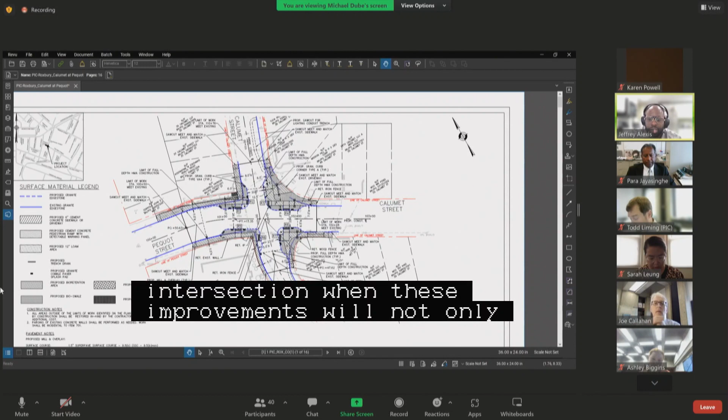With these improvements, we will not only improve accessibility and pedestrian safety at this intersection, but we hope to implement additional design elements like new lighting to improve visibility and green infrastructure to address potential heat island issues we tend to see in intersections like this one.

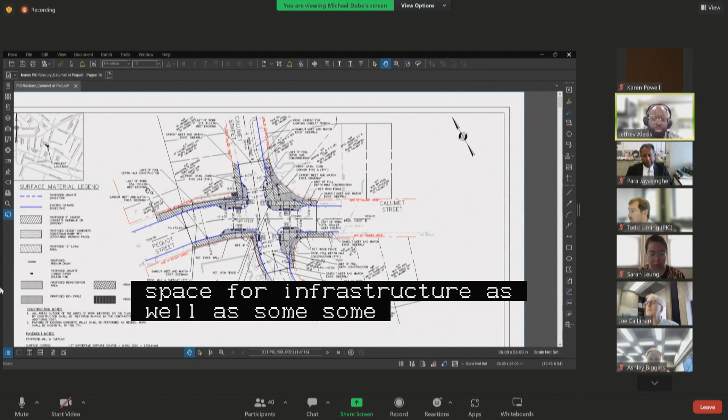As this is a continuation, we have been working with some of the residents in this neighborhood regarding concerns they had about the proposed improvements. We have looked at opportunities to make changes to the design, including reintroducing a parking spot that we had removed in order to provide more space for green infrastructure, as well as some elements we are including for one of the property owners at this intersection in regards to their driveway.

There are concerns about some of the snow removal, but we have been working with them, and we're hoping that the safety benefits we're proposing as part of this project outweigh some of the negative aspects, which is the additional sidewalk space that may need to be plowed.

With that, I'll turn it over to Mike to get into more of the details. Thanks, Jeff. Good morning, commissioners. My name is Mike Dube with GPI. As Jeff mentioned, this is a project at Pequot Street, Calumet Street, Darling Street, in Roxbury. This project proposes to improve pedestrian safety overall at this intersection by minimizing the sea of pavement, providing curb bump-outs that shorten pedestrian crossing distances, providing new cement concrete pedestrian ramps, sidewalks, green infrastructure with plantings and low ground cover, and new underground lighting infrastructure.

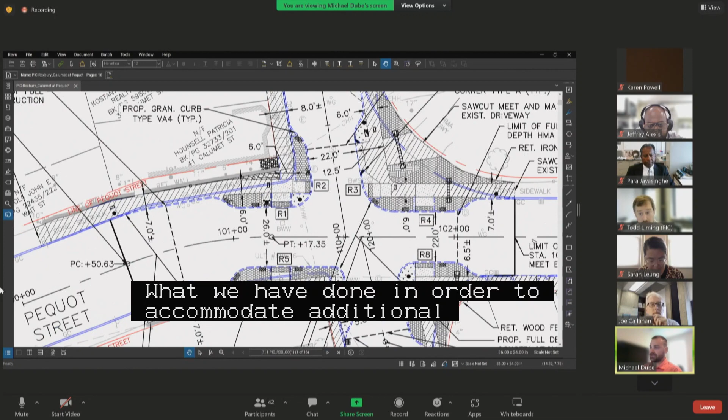As Jeff mentioned, we've coordinated with the public recently after the last public hearing to introduce a couple of minor changes to address some of their concerns. One concern was the limitation or removal of parking spaces. So to accommodate an additional parking space, we've reduced this curb bump-out on the north side of Pequot Street, shortening it up towards the intersection, providing an additional space here, giving back one more parking space at the intersection.

Another concern was related to the driveway at 49 Calumet Street in this corner. We were previously just constructing up to the driveway, but through coordination with the property owner and future development proposed there, we've extended the sidewalk reconstruction. We proposed a new driveway curb cut so the future development can be installed with our proposed bump-outs and intersection geometry. So those were the two changes made in coordination with the public since the previous public hearing, and these are the plans we're proposing to move forward with. I'll open it up to any questions.

Commissioners, any questions? And I will just say, if there are members of the public who are interested in testifying on this, please use the raise hand function on Zoom, which you can find under reactions. You should be able to find the button to raise your hand, and we'll call on you once commissioners have had a chance to speak.

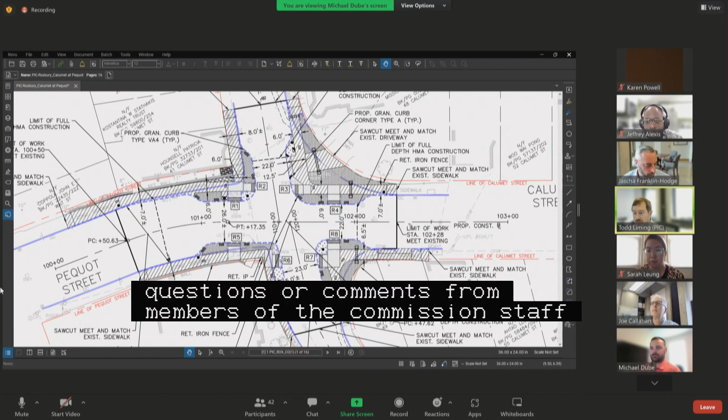Commissioners? All right, seeing no questions or comments from members of the commission, PIC staff, or members of the public. I'll mention that we had a few pieces of written testimony come in over the past few weeks, but those have been passed on to the commission for consideration. I'll give the public another 15 seconds or so to try to find the raise hand function if they want. PIC staff doesn't have any comments other than that I understand the latest plans have been updated, and we'll need a copy of those from the project team as soon as they're available. I see no raised hands.

I think we're all set. All right, do I hear a motion to approve? I make a motion to approve a petition by the City of Boston Public Works Department for the making of specific repairs in Calumet Street, Pequot Street, and Darling Street as read into the record by the chair. Second. All in favor? Aye. Aye. Aye. Any opposed or abstain? So moved. Thank you very much.

All right, we are going to jump back in our agenda to utility pole hearing number 1, which I will reread: a petition by Eversource Energy for a utility pole installation within Soldiers Field Place, Public Way, Brighton, to install 1 new private utility pole to be located on its southerly side, generally across from address number 44, southeast of Soldiers Field Road.

Would the proponents please introduce themselves, their affiliations, and walk us through what you're proposing to do? Hi, good morning, my name is Katie Flaherty, and I'm going to share the screen to show you the plan. You should be able to share. Bear with me. I have to share—oh, I don't know which one is. Sorry, we're having trouble here. I'm trying to share a screen with the plan on it, and I'm not able to.

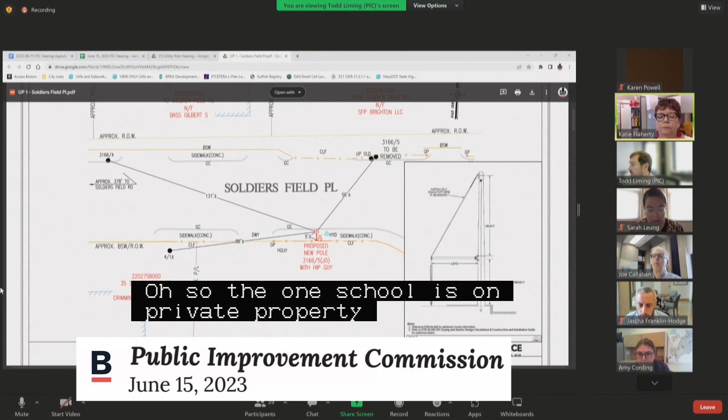Is the guy pole existing? It is not, and that's on private property? It's not on private property. Oh, so the existing pole is on private property. But we are gonna, that guy wire on there won't go. We'll put a hip guy on the proposed pole. So everything's shown in red right there.

The pole will go in the sidewalk, and then there'll be a sidewalk anchor. The guy wire will be overhead and then come straight down, as opposed to at an angle on that pole.

But you're installing a guy pole on private property? No, we're installing that proposed pole on the public way, on the sidewalk, I'm sorry. So pole 5, currently on the north side of the street, we're gonna move it to the southerly side, and then that pole 5 will have a guy wire on it. The original pole 5 will come out once everything's moved.

And I guess the question is, where does the guy wire go? The anchor will go as close to the fence as possible, but it'll still be within the public way, at the back of the sidewalk.

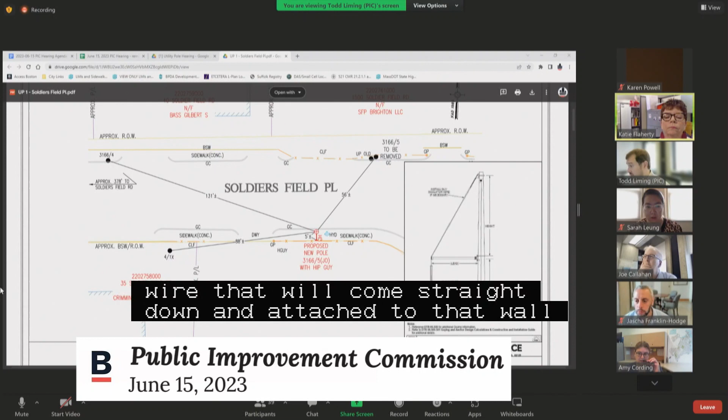So you're going to put two structures in the public sidewalk at this location, the pole and the guy anchor. What's the dimension between those two? So it's not going to be two poles, Amy. There'll be a pole right at the front of the sidewalk, and then the anchor itself is like a big, huge eye bolt that goes way down into the ground, and just the loop of that bolt sticks up. At the top of the pole, there'll be a straight bar coming out, and the guy wire itself, a thin wire strand, will come straight down and attach to that eye bolt at the back end of the sidewalk. There'll be about 5 feet between that guy wire and the pole, so it'll allow for pedestrian traffic.

When it's installed, is it possible to verify that dimension to ensure that it is indeed 5 feet? That's why I want it that way. Our survey group measured, and that's what they put on the plan. If you need us to measure it or mark it in the field before the actual installation, we can certainly do that. I think that would be helpful just to get the in-field conditions, since sometimes the field is a little different from what's on the plan, so we just want to verify that dimension is preserved.

Can you clarify why, I mean this seems new for us, right? We don't get a lot of these sidewalk guy pole situations. Can you explain why this happens here? Yeah, these are kind of all over the place, you just don't really notice them. Well, just here, where we approve these things, we haven't seen them in my memory of being here.

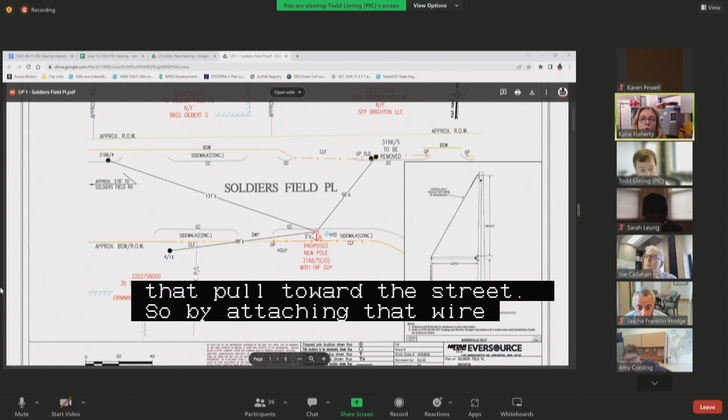So can't we basically put in a pole that supports this on its own? If you look at pole 4 and pole 5 on this plan, they're kind of in a straight line on the same side of the street. By moving pole 5 across the street, we're actually creating an angle on the overhead lines attached to the pole. Because of the weight of any equipment or wires, that weight wants to pull the pole forward, toward the street. So by attaching that guy wire to the back of the pole, we're pulling it straight upright and holding it steady so it doesn't lean or fall over.

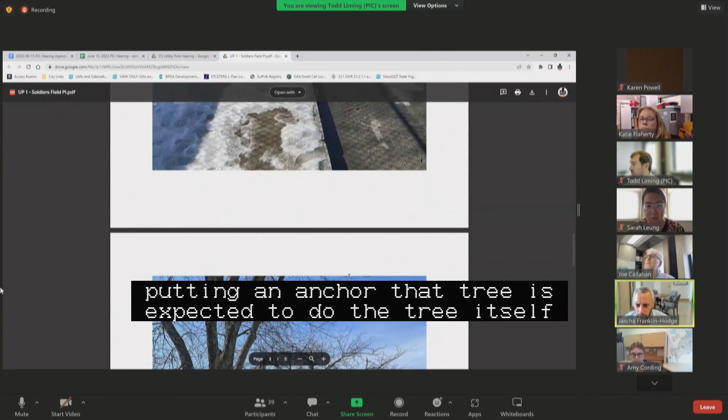Can I ask about the location of this? There appears to be, if I'm in the right place, a tree located on private property, just on the other side of the fence line. I want to understand what putting an anchor adjacent to that tree is expected to do to the tree itself, and what kind of tree trimming would be required to accommodate this pole and this location. So I'm looking at the photos you have.

It doesn't look like the branches are really going to impede where the anchor is going to go, and the wire is going to go straight down. It looks like all the leafy branches that extend off are going to be above that line, so it wouldn't be an issue there. The eye bolt itself, the part that sticks into the ground, is just a long, straight, thin rod. It's not huge, so it shouldn't impede any tree roots or cause problems like that.

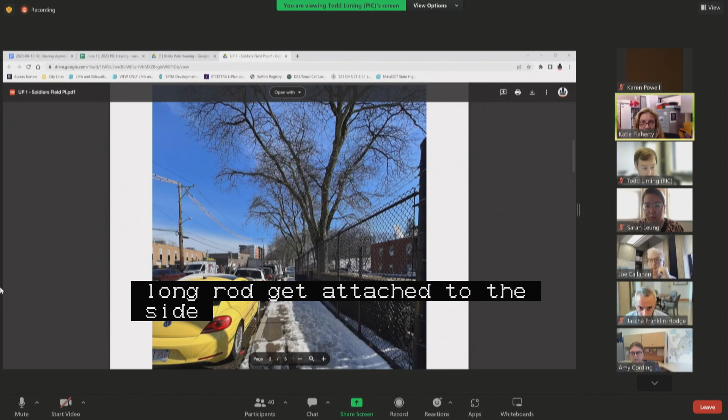How does that long, thin rod get attached to the sidewalk? That would be more for an operations construction question. I can get those answers to you, but I've only seen them out. I think whatever's holding up a pole is probably going some depth into the ground where we'll probably discover the roots of this tree. Yeah, probably about 6 feet down, same as the pole, because obviously we don't want it to lean, we don't want it compromised.

The only thing I can do here, Amy, is have somebody from operations explain it, and I can get back to you with that. But I've only seen them when they're existing. I haven't seen the actual install to see how they do it.

I think we probably want to see that, especially if it's going 6 feet into the ground. I think we understand the poles, but this is something that, while I believe it exists all over the place, we have not approved in recent memory. I think we stand to find the roots of that tree and go all the way through them if you're going to burrow 6 feet down. So understanding what this looks like on the surface, and also understanding why we regularly have to relocate a pole to the opposite side of the street, and that has not required this particular guy method in the past—is there a different pole option, foundation option, or whatever that could support this?

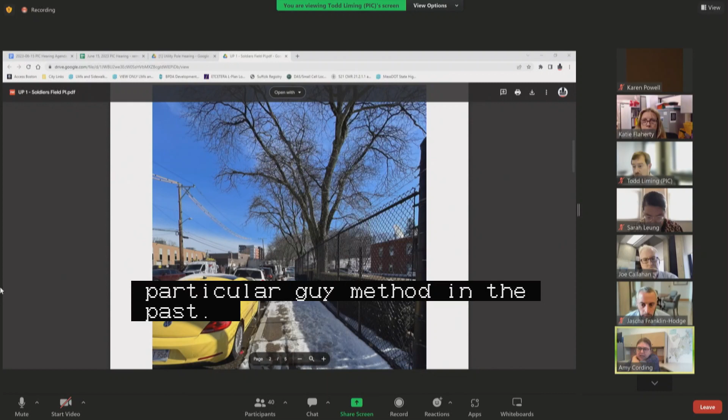This is a very narrow sidewalk to put two things, one at the front and one at the back, and then have something run overhead bounding the whole sidewalk. I think it'd be nice to have clarity as to where your pole falls in relation to this tree. It might be the perspective in this picture, but it looks like it's going to find its way into that tree, and the wires in particular seem like they will also. But the guy piece at the back will substantially impact the roots of this tree when you install it.

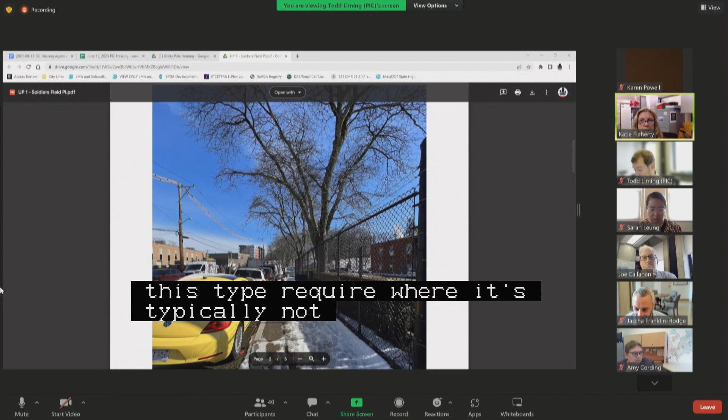The other thing I can do is have our engineer circle back and contact you guys at City Hall, come right to PIC, and we can have a discussion about it. I guess if that's the case, the best I could ask for is a continuance, as opposed to—if we can approve it on the condition that these answers are satisfied and not have to come back for another hearing, that'd be the ideal option. But if you need us to continue it, I don't have those other answers. I think a continuance would be appropriate here. The questions are both about the mechanics of installation and about the appropriateness of the location and the impacts of that. I would feel more comfortable if we continued until we could really unpack what this does to the trees and the shade canopy, and answer the installation related questions.

Okay, can you just tell me your next hearing date? I don't have your calendar in front of me. July 29th—sorry, June 29th, excuse me. June 29th. All right, that sounds better. I'm jumping ahead.

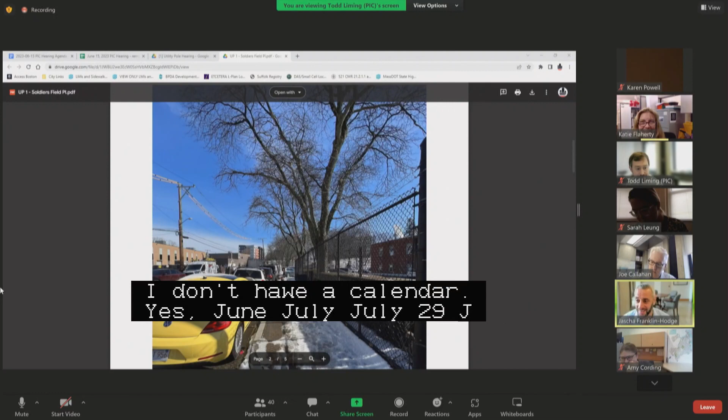Yeah, that's fine. We'll have answers before that, so we'll have this resolved before we come back for the next hearing. Okay.

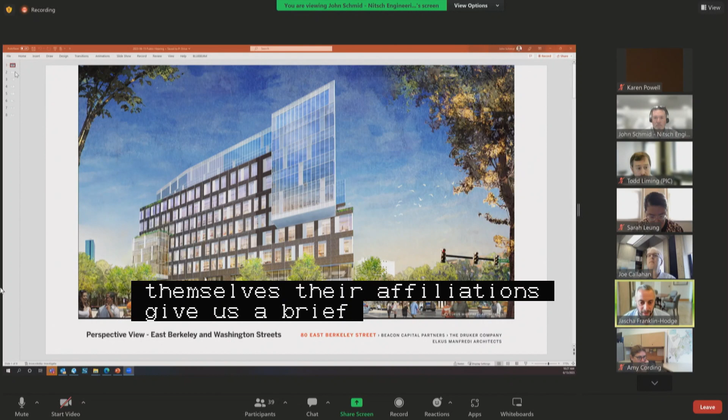Would the proponents please introduce themselves, their affiliations, and give us a brief reintroduction to the petition and any changes since your new business hearing. Yes, good morning.

My name is Barbara Boylan. I am representing Drucker 80 EB LLC with my joint venture partner, Beacon Capital Partners, Mike Loring. This is a project at 80 East Berkeley, and our team members here today are Nitsch Engineering's John Schmid, Marissa Valentino, Goulston and Storrs' David Linhart, and from Mikyoung Kim Design, Brian Chow.

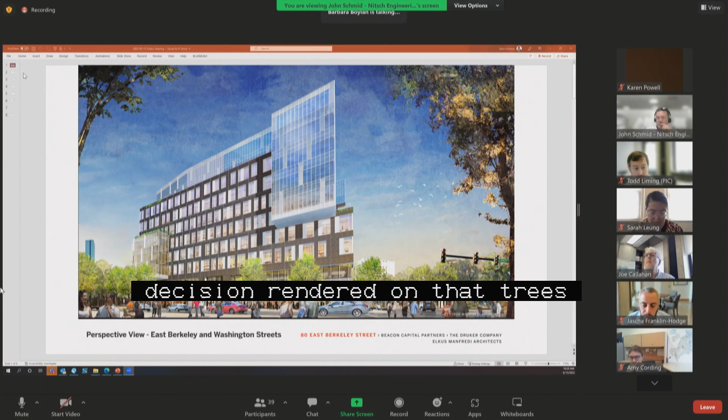Since we last met with you, we have attended a public hearing on June 1st for the tree removal and have had a decision rendered that the trees can be removed. So I'd like today, on behalf of Drucker 80 EB LLC, to turn it over to John Schmid. This is a project that's approved through the Article 80 process for ground floor retail and restaurants with life science office above.

Thank you, Commissioner and Commissioners and Chairman. Thank you, Barbara. I'm John Schmid with Nitsch Engineering. The first action before you is the creation of the pedestrian easements, required to provide accessible access within the realm of the complete street guidelines. On Shawmut Ave, we are proposing a 2.4-foot wide easement consisting of approximately 279 square feet. Along East Berkeley Street, the easement is approximately 7 feet wide, consisting of about 1,512 square feet.

Any questions regarding this petition? Commissioners? PIC staff, members of the public? All set.

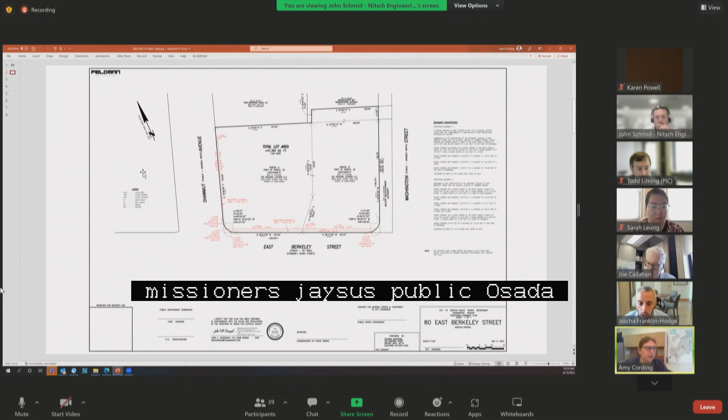All right, seeing no hands raised, do I hear a motion to approve public hearing number 1? I'll make a motion to approve a petition by Drucker 80 EB LLC for the acceptance of 2 pedestrian easements in East Berkeley Street and Shawmut Ave, as read into the record by the chair. Second. All in favor? Aye. Aye. Any opposed or abstained?

So moved. On to public hearing number 2, on a petition by Drucker 80 EB LLC for the making of specific repairs within the following public ways in Boston proper, consisting of curb realignment, roadway and sidewalk reconstruction with structural soil, as well as new and relocated pedestrian ramps, specialty pavement, street lighting infrastructure, street trees, planters, landscaping, bike racks, and driveway curb cuts. East Berkeley Street at address number 80, generally between Washington Street and Shawmut Avenue. Washington Street, generally northeast of East Berkeley Street. Shawmut Avenue, generally northeast of East Berkeley Street. New business from 5/11, as shown on a set of plans entitled City of Boston Public Works Department Engineering Division Specific Repairs Plan, East Berkeley Street, Shawmut Avenue, Washington Street, 80 East Berkeley Street, South End, 5 sheets, dated May 4th, 2023.

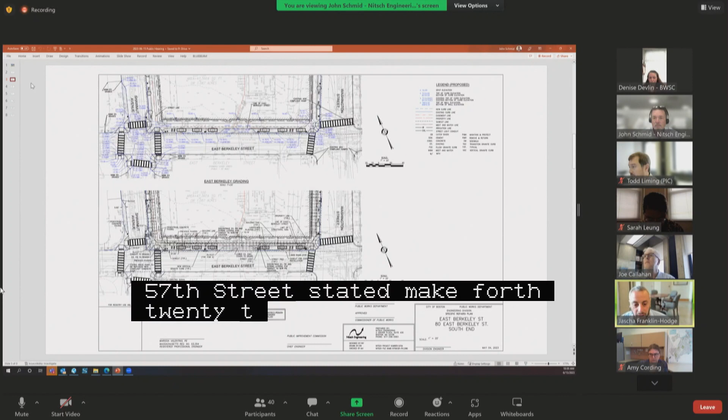The proponents please reintroduce themselves and walk us through this specific action. Good morning, John Schmid from Nitsch Engineering, here on behalf of Drucker. We have 3 streets that are all being reconstructed in order for the project to move forward, and they're being reconstructed in compliance with complete street guidelines.

Along East Berkeley Street, we're proposing an 8-foot wide accessible concrete sidewalk. In front of that, there'll be a 7-foot wide pervious paver frontage zone that will include 6 new street trees, new street lighting, and bike racks. There is also a pullover, as you can see in the center of the parcel, for vehicles to pull over and get out of the line of traffic to serve this building.

There's also a 6-foot pervious section of pavement in front of the building, between the front of the building and the concrete sidewalk. By moving to the next street.

On Shawmut Ave, there will be 4 new street trees, as discussed earlier. There is an 8-foot wide concrete sidewalk, a 5-foot wide pervious paver along the frontage zone, and 6 feet wide of pervious paver along the building face. We're also constructing 3 new street lights.

And if you look across the intersection from East Berkeley Street, you can see how we're bumping out that intersection. We're reconstructing the ramps at all 4 corners to provide safe perpendicular access to the sidewalk.

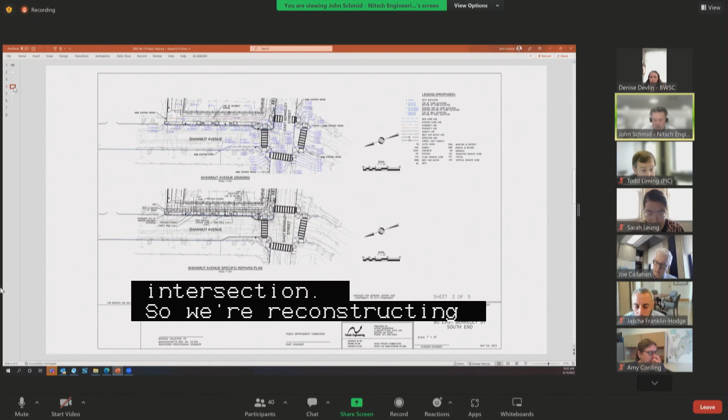As we get to Washington Street we'll have a 12-foot wide concrete sidewalk and a 4-foot pervious frontage zone. We have 4 bike rack locations, 4 new street trees, and 3 new light poles, along with the conduit and pole boxes associated with that work. That's the extent of my presentation for specific repairs.

Commissioners, questions, comments?

Yeah, these guys did a ton with us to work on the ramps out here, and we have received that, and it's great. I think we do have some lingering comments about how the transitions happen. I do not want to slow this down or hold this up, but it will be contingent upon us finishing the ramp designs, and I will defer to Sarah. But yeah, I think it's substantially there. We just have some slopes and transitions that need to be worked out.

Yeah, I mean, we can finesse those designs with you prior to submitting the Mylars. Thank you.

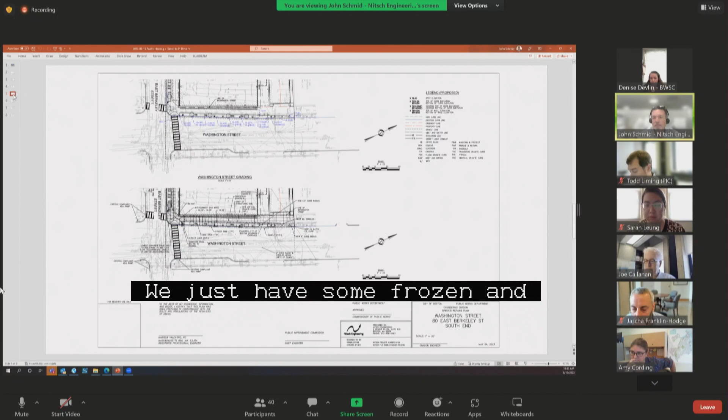Just to see, I may be misreading the plans, but are we moving the curb line on Washington Street? We are not moving the curb line on Washington Street. Okay, got it. Commissioners, any other questions, comments?

PIC staff, members of the public? All set. All right, do I hear a motion to approve public hearing number 2?

I'll make a motion to approve a petition by Drucker 80 EB LLC for the making of specific repairs within East Berkeley Street, Washington Street, and Shawmut Ave as read into the record by the chair, contingent upon the final design as approved by the Commission for Persons with Disability and BTD.

Second. All in favor? Aye. Aye. Aye. Aye. Any opposed or abstain? All right, so moved. Thank you.

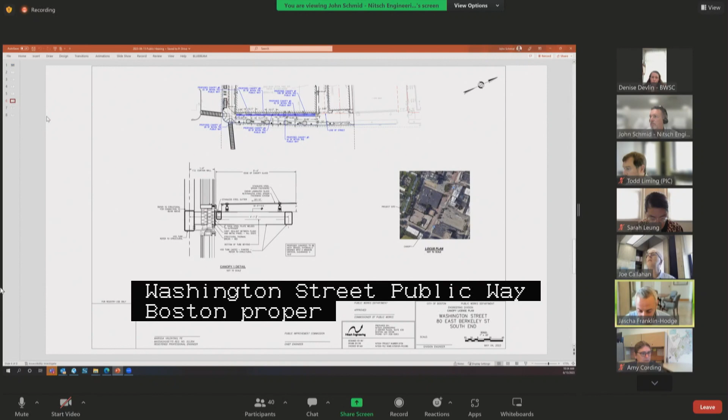On to public hearing number 3 on a petition by Drucker 80 EB LLC for the granting of a projection license for the installation of canopies over portions of the sidewalk within Washington Street Public Way, Boston proper, located on its northwesterly side at the site of 80 East Berkeley Street. New business from 5/11, as shown on a plan entitled City of Boston Public Works Department Engineering Division Canopy License Plan, Washington Street, 80 East Berkeley Street, South End, one sheet dated April 24th, 2023.

The proponents please reintroduce themselves and their affiliations and give us a quick overview of this and any changes since your new business hearing. Good morning, John Schmid with Nitsch Engineering here on behalf of the Drucker Company.

We are proposing 6 canopies along Washington Street, consisting of steel and glass. They are internally drained and heat traced. They're 10 feet or greater above the public sidewalk, and they project well below the allowable 2/3 sidewalk width. They project approximately 2 or 3 feet into the public way.

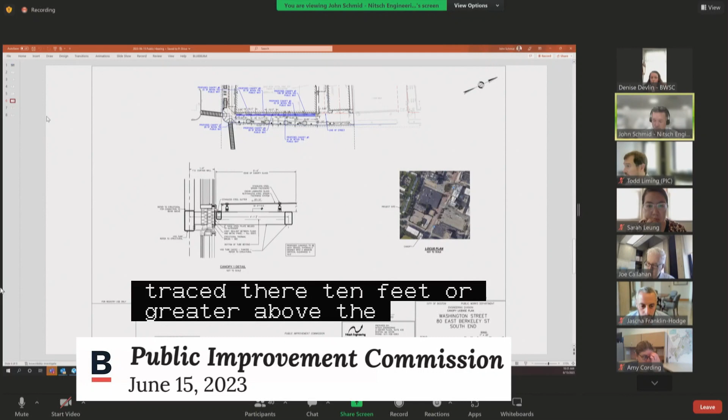Any questions? Commissioners? PIC staff or members of the public? All set.

Do I hear a motion to approve public hearing number 3? I make a motion to approve a petition by Drucker 80 EB LLC for the granting of a projection license in Washington Street as read into the record by the chair.

Second. All in favor? Aye. Aye. Aye. Aye. Any opposed or abstain? So moved. Thank you very much.

Thank you. Thank you very much. We appreciate it. Yeah. Thank you for your work with the commission.

On to public hearing number 4 on a petition by the Boston Water and Sewer Commission for the making of specific repairs within Harrison Avenue Public Way, Boston proper, located on its southeasterly side at address number 980, generally between Melnea Cass Boulevard and Thorndike Street, consisting of sidewalk reconstruction as well as new and relocated specialty pavement, street lighting infrastructure, and bollards. New business from 5/25, as shown on a set of plans entitled City of Boston Public Works Department Engineering Division, Specific Repair Plan, 980 Harrison Avenue, Boston, 3 sheets dated June 8th, 2023.

The proponents please introduce themselves, their affiliations, and give us a brief overview of this project and any changes since your new business hearing. Thank you, Mr. Chairman, Mr. Liming, and members of the commission.

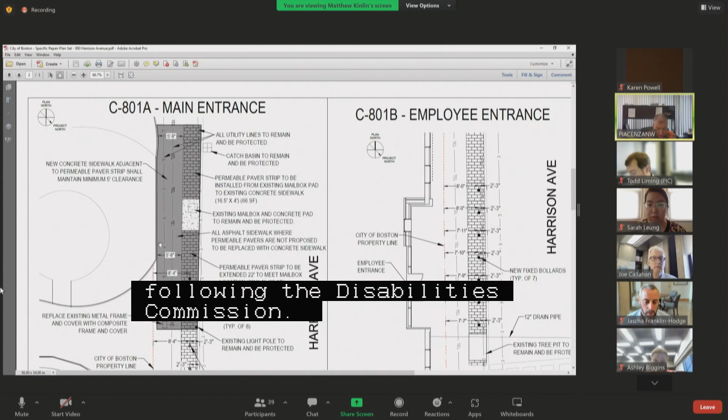Since that initial presentation, we've also been asked to do the following: the Disabilities Commission, Sarah, asked us to confirm the dimension of the concrete path between the planter and the extended permeable paver strip, and to verify that the 5-foot clear minimum dimension has been met. Tristan from Street Lighting requested that we add scope to replace an existing metallic electrical handhold with one made of composite materials. All of these requests have been met, and I'll turn it over to Matt from our engineers at Gale to go over the specifics.

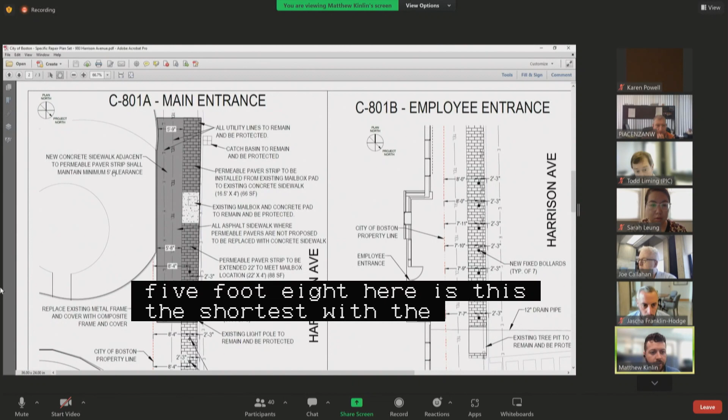Good morning, everyone. As we said, we extended the paver section here where this is an existing asphalt sidewalk. We're making that concrete, and we're extending the pavers here. I have labeled 5'9" and 5'8" as the shortest width of the concrete sidewalk. I added a note here to be sure we maintain that minimum 5-foot clearance. Right here in the corner of the existing asphalt sidewalk, we have a metal frame and cover electric handhold that we are proposing to replace with a composite frame and cover. And over here, we have the existing tree pits labeled to remain and be protected.

So that is all we have for the comments, addressing the comments provided. Commissioners, any questions or comments?

We just appreciate the team's willingness to incorporate our feedback. Thank you.

PIC staff or members of the public? All set. All right, do I hear a motion to approve public hearing number 4?

I will make a motion to approve a petition by the Boston Water and Sewer Commission for the making of specific repairs in Harrison Ave. Second. All in favor? Aye. Aye. Any opposed or abstain? So moved. Thank you very much.

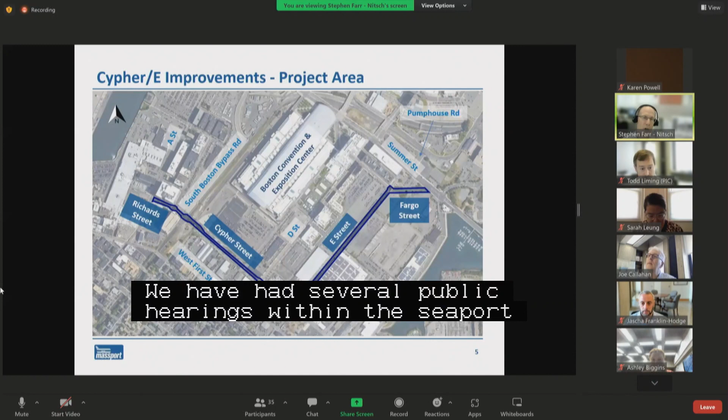This is the project team led by Nitsch Engineering. We have had several public hearings with the Seaport residents and neighborhood associations. These are some of those. The project again extends from Richards Street all the way across the South Boston bypass through Cypher Street, down E Street and Fargo Street.

Today, there are no pedestrians allowed on New Cypher Street. There are no pedestrian facilities or bicycle facilities. People are walking in the street, as you can see in these photos, and cycling adjacent to heavy truck traffic without any accessibility or accommodations at all.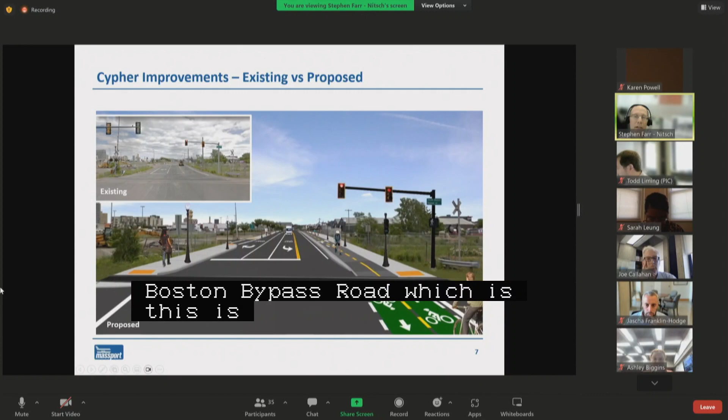The proposed project will include accessibility for all modes of travel, new sidewalks, a 10-foot dual bike lane on the south side of New Cypher Street, new pedestrian and vehicle signals at the intersection of the South Boston Bypass Road, a new railroad track crossing, and new street lighting and pedestrian ramps at each of the locations.

This is a view of Richards Street looking at the South Boston Bypass intersection, narrowing the street and pushing the curb line out to facilitate the installation of a 10-foot multi-directional bike path along the south side of Richards Street.

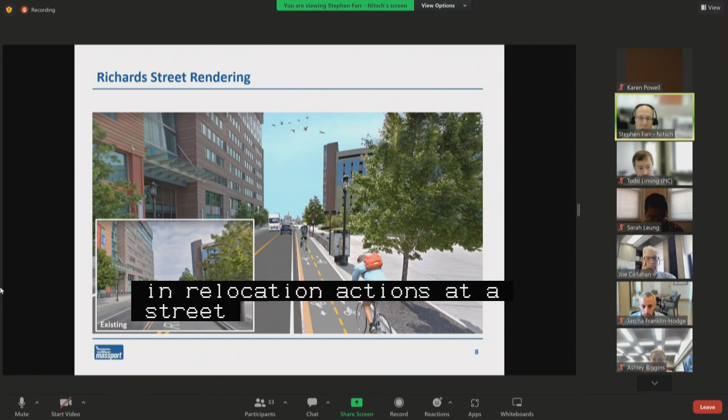We have several widening and relocation actions proposed at A Street, Richards Street, and New Cypher Street, as well as specific repairs for those locations.

As Steve mentioned earlier, we've had several community meetings; Massport took over the project from MassDOT. There were 3 community meetings in particular, 1 in February and 2 in March. We have continued to engage the community, and since the hearing on the 25th of May, we have received additional comments from the community. So on behalf of Massport, we respectfully request a continuance to the next business hearing, I believe on the 29th, to allow for additional dialogue with the community.

All right, excellent. We're certainly happy to grant that continuance, but before we do, we'll open it up to see first if there are any commissioner questions or comments that folks would like to ask at this time, and then whether there are any members of the public who would like to speak on this. If there are, please use the raise hand function to let us know. But commissioners, anything that you'd like to ask today?

Yeah, Mr. Chair, I have a point. Mr. Farr, can you put up your presentation? I just want to see if you can amplify a point of clarification. Basically, the travel lanes that are there on any one of the streets, are they remaining the same, or is there a disparity? Like right now, you've got a lane in each direction. Are they remaining the same?

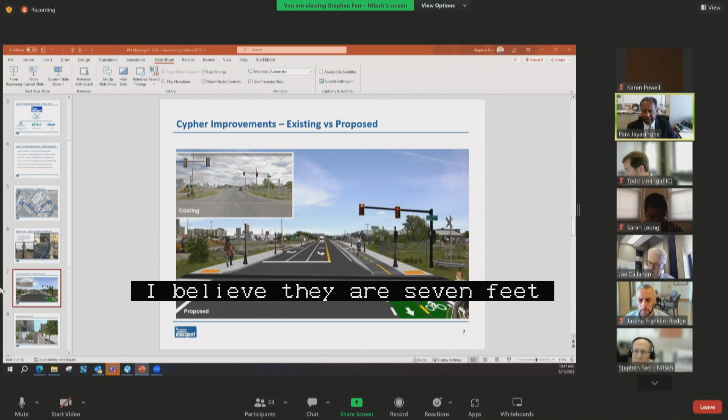Steve: Yeah, the travel lanes are remaining the same. I believe they are 11-foot travel lanes with 2-foot shoulders, so the number of travel lanes is consistent between the existing and proposed conditions. On New Cypher Street, the travel lanes are remaining the same. On Richards Street, we are reducing the number of travel lanes in the westbound direction, the direction coming towards us in this photo, to 1 lane, where today there is a left turn lane in that direction—so we are reducing it from a double lane to a single lane.

But Cypher Street is basically the same, right? Correct. Thank you. Just to follow up, on Richards Street, can you tell us a little bit about any work that's been done related to the Richards A Street signal, and any analysis about the impact of that lane reduction and how that might flow through into signal retiming?

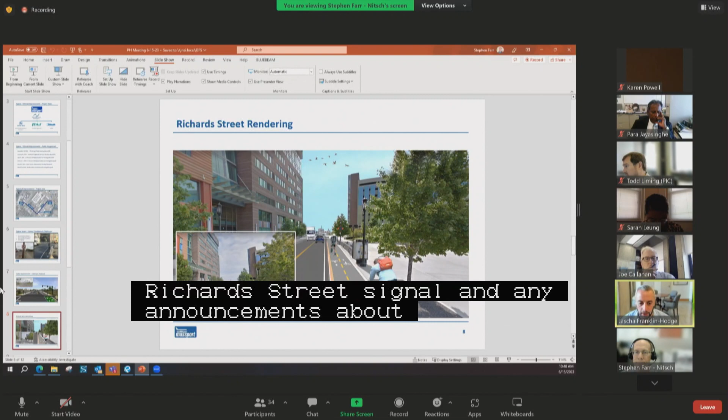Yeah, so that intersection, which you can see the existing view of here in the bottom left, the signalized intersection would be behind us in this view. We are going to redo some of the signals and the timing and phasing of that intersection. We've worked closely with BTD to assure that the traffic will operate at an acceptable level of service, and I think we've satisfied all of their concerns and comments.

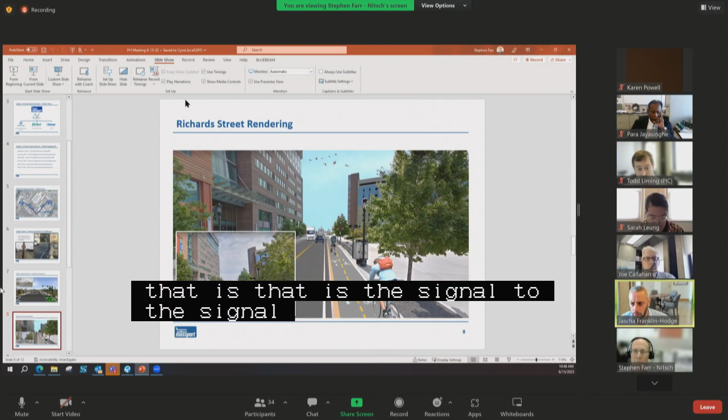And related to that, do those signal changes incorporate phasing for bicycle movements? There's some bicycle facilities on A Street today that presumably will see some traffic connecting to and from this two-way bike path. So how has that been phased into the design of that intersection?

That's correct. There is a current bike facility that goes north-south on A Street today, and this is going to make the connection between A Street and D Street, which also has a bicycle path. The two signalized intersections, the one at A Street and the one at the South Boston Bypass, will have bicycle signals to facilitate that movement.

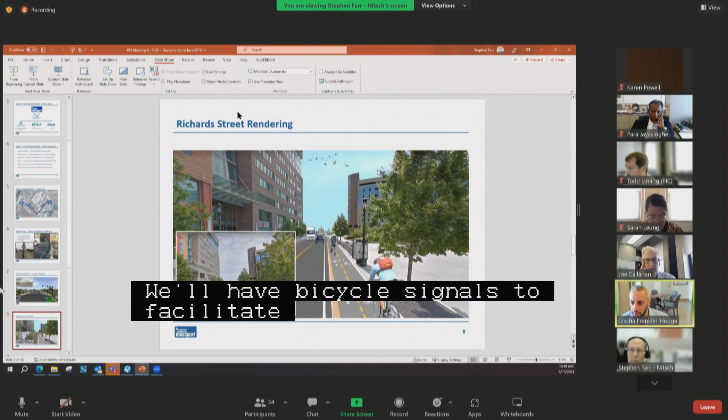Okay, so there'll be some kind of separation to allow the two-way facility to transition into the two separate one-way facilities at each location without putting bikes and vehicles into conflict with one another. Exactly. Okay, commissioners, any other questions, comments?

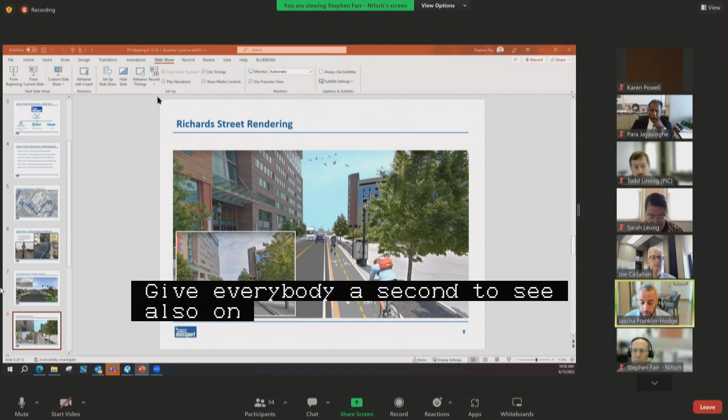Okay, just to confirm, I'm assuming with the Massport folks that you intend to continue on all of the items on the agenda related to this. Confirm, Mr. Chairman. Okay, I think we will go through them one by one, do a quick read, and you can introduce yourselves and ask for the continuance, and we'll turn through the list because there are a few of them here.

So with that, do I hear a motion to continue public hearing number 5? I'll make a motion to continue public hearing number 5 as read into the record by the chair until June 29th. Second. All in favor? Aye. Aye. Aye. Any opposed or abstain?

So moved. On to public hearing number 6, on a joint petition by the Massachusetts Port Authority and the Massachusetts Department of Transportation for the widening and relocation of the existing right-of-way lines of A Street Public Way, South Boston, located on its northeasterly side, generally across from Richards Street, new business from 525, as shown on a plan entitled City of Boston Public Works Department Engineering Division Widening and Relocation Plan, A Street Public Way, South Boston, one sheet dated May 19th, 2023. Would the petitioners please introduce themselves, their affiliations, and let us know how you would like us to proceed on this.

Louis Huang, Massport Deputy Director of Programs and Environmental Affairs. On behalf of Massport and MassDOT, we request continuance to the next hearing on the 29th, please.

Do I hear a motion to continue public hearing number 6? I'll make a motion to continue public hearing number 6 as read into the record by the chair until June 29th. Second. All in favor? Aye. Aye. Aye. Any opposed or abstain?

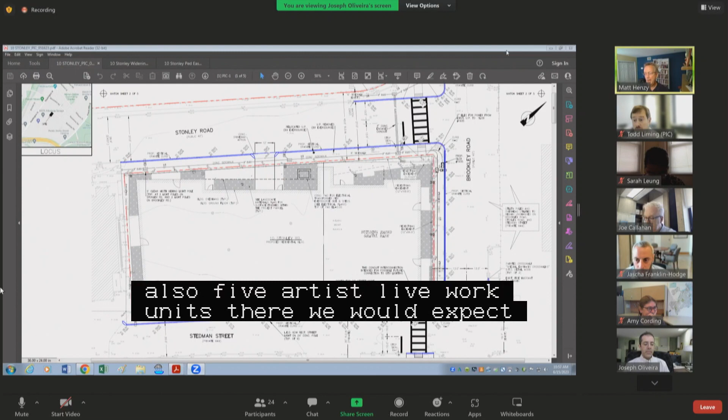With respect to PIC and public infrastructure improvements, we have, I believe, a pretty extensive set of public infrastructure improvements, both in the public ways and private ways. We've had a great process with many members of the commission and many city agencies, lots of feedback back and forth, and we think we've come out with a set of 3 plans for public hearings number 9, 10, and 11. Not to skip ahead, but that is responsive to all the input we've had. So with that, and obviously if the commissioners want to circle back with any detailed questions, I am here.

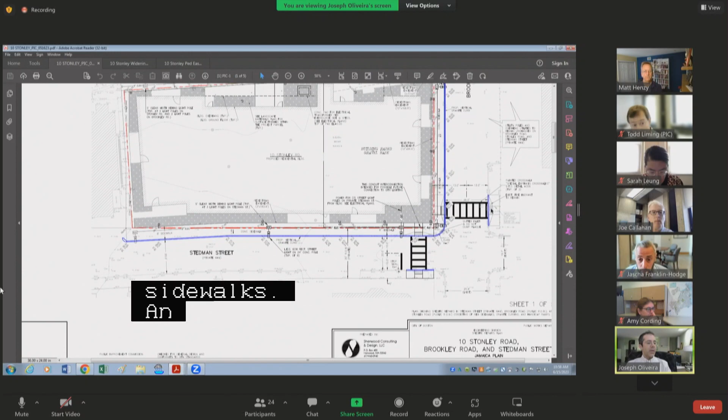But with that, I'll pass it over to the civil engineer, Joe Oliveira, who has graciously already screen shared. Thanks, Matt. Yeah, as Matt described, it's a 45-unit apartment building, and to accommodate that, we're adding new sidewalks and curbs along Stonley Road and Brookley Road, which are public ways, and also on Stedman Street, which is a private way. We are also including 12-inch pedestrian easements along Stonley Road and along Brookley Road to accommodate the new sidewalks. And we are also including a widening and relocation plan for Stedman Street, which is a private street, and that's to accommodate a slight realignment of the street and the new sidewalks. And then the last piece is a triangle at the intersection of Stonley and Brookley, and that's narrowing that intersection with the concrete sidewalk triangle and new handicap ramps and the street tree.

I'm glad to answer any questions. Commissioners, questions?

We had one comment about coordinating with Active Transportation about the addition of speed humps here. We have put speed humps in this neighborhood, and we skipped this based on its trucking use, but with a different use, this should have the same traffic calming as the rest of the neighborhood.

Should I be responding to that as the proposer? Well, at New Business, I raised this as a zone that had speed humps. This area right in front of you was deliberately not done based on trucking uses, and so with this, we would like those missing speed humps to be added as part of this project. So that is the ask. The hope was that between the New Business and the public hearing you would have coordinated with BTD about that. We can still do that, but the request is that you install the speed humps that we would have installed had this been this use at that time.

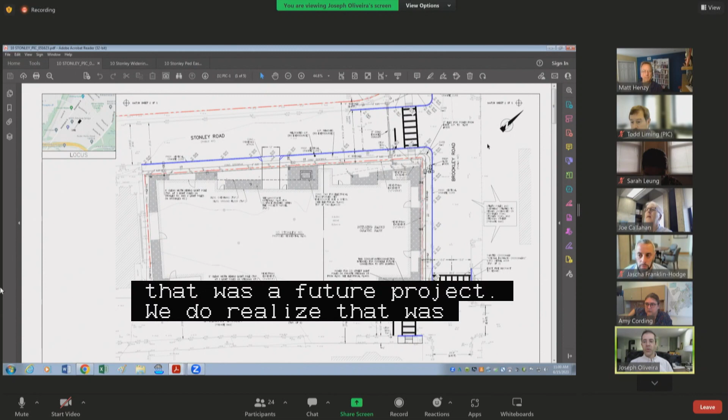Yeah, that came up at the last hearing, and it was our understanding that that was a future project. We didn't realize that was already designed or drawn out. And then the other piece of that is that the proposal for this project actually does not include any roadway repaving, so we're maintaining the existing pavement as is. We're just starting at the curb back. Yep, and you can add speed humps to existing pavement.

That's how we do it too. It's just that we weren't calming here because it was truck use, and now that it's not, it should have the same traffic calming as the rest of the neighborhood, so that we're not inducing speed at your new development.

Are you saying that the city will come back and install those, or are you asking the project to install those? We're asking the project to install. Okay, that wasn't clear last time.

I got that. To be fair, this shouldn't be a big lift, right? It's really just mounds of asphalt at a couple of key locations. We very specifically skipped this location, whereas it would have been included, so now that it's a residential situation, we would like that to come back.

Yeah, I don't think there will be any problem adding those. And we can work with BTD on the location.

Absolutely. Okay, just quickly on detail, Amy, the one constraint I see is there is still existing truck use at the, I'll say west or south, of Stedman. There's a large site work facility, a private company called JRF. They have large trucking vehicles that use Stedman and Brookley.

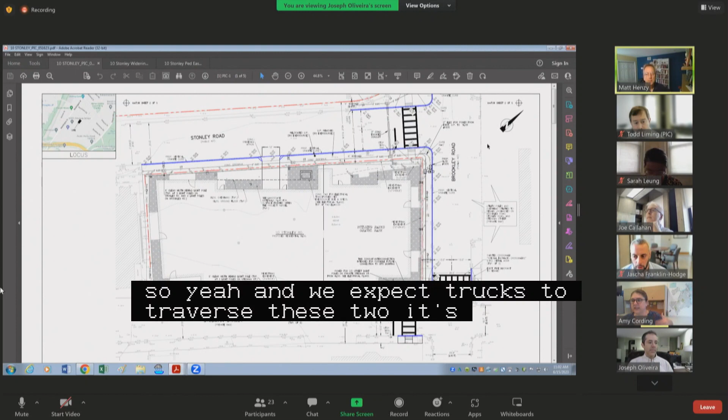Understood, but we put them everywhere, right? Trucks still have to go. It was just that we weren't in front of an industrial driveway until it stopped being there.

Understood, we will follow up with BTD on that. Apologies for not moving on it since the new business hearing. Perfect.

Commissioners, other questions or comments? PIC staff or members of the public? No, I think we're all set with this widening petition.

Do I hear a motion to approve public hearing number 9? I'll make a motion to approve a petition by Stonley Brookley LLC for the widening and relocation of Stedman Street, as read into the record by the chair. All in favor? Aye. Any opposed or abstained?

So moved. On to public hearing 10 on a petition by Stonley Brookley LLC for the acceptance of pedestrian easements adjacent to the following public ways in Jamaica Plain: Stonley Road on its southeasterly side at address number 10, southwest of Brookley Road on its southwesterly side between Stonley Road and Stedman Street, new business from 525, as shown on a plan entitled City of Boston Public Works Department Engineering Division Pedestrian Easement Plan, 10 Stonley Road and Brookley Road, Jamaica Plain, one sheet dated March 2023.

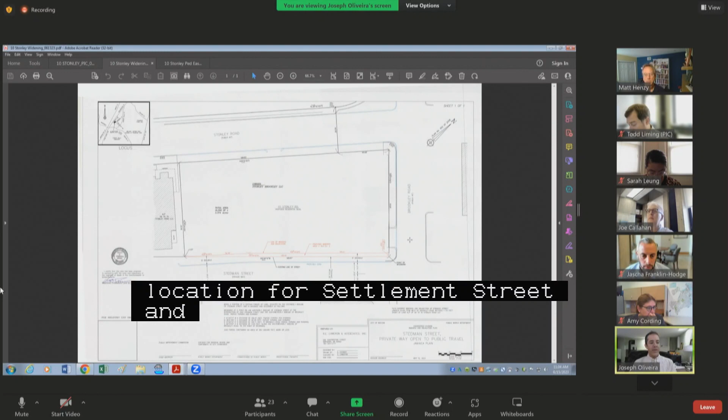We need the ped easements plan on this one, Joe. Oh, you want to do that one first? Okay, my apologies. So the project includes a pedestrian easement plan that calls for 12-inch easements along Stonley Road and along Brookley Road, as well as a corner pedestrian easement at the corner of Stonley and Brookley to accommodate the upper landing on a handicap ramp.

Glad to answer questions. Commissioners? PIC staff or members of the public?

All staff. Do I hear a motion to approve public hearing number 10? I'll make a motion to approve a petition by Stonley Brookley LLC for the acceptance of pedestrian easements in Stonley Road and Brookley Road as read into the record by the chair. Second. All in favor? Aye. Any opposed or abstained?

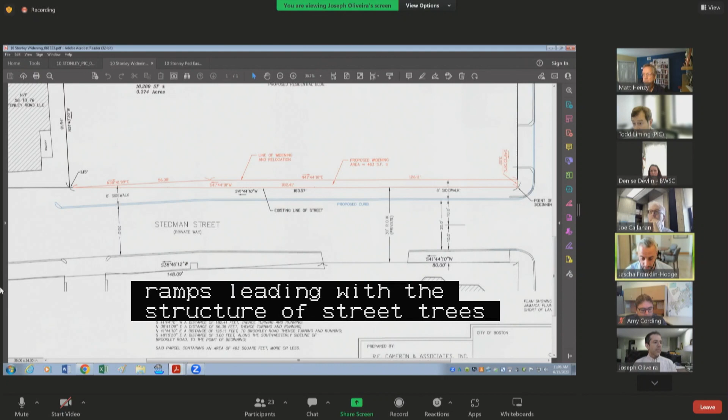So moved. On to public hearing number 11 on a petition by Stonley Brookley LLC for the making of specific repairs within the following roadways in Jamaica Plain, consisting of curb realignment, sidewalk reconstruction, as well as new and relocated pedestrian ramps, street lighting infrastructure, street trees, and driveway curb cuts. Stonley Road at address number 10, southwest of Brookley Road, generally between Stonley Road and Stedman Street.

Stedman Street, private way, southwest of Brookley Road, new business from 525, as shown on a set of plans entitled City of Boston Public Works Department Engineering Division Specific Repairs Plan, 10 Stonley Road, Brookley Road, and Stedman Street, Jamaica Plain, one sheet dated May 16, 2023. Would the proponents please reintroduce themselves and give us a brief overview of these specific repairs and any changes since your new business hearing?

Thank you again, Matt Henzy for Stonley Brookley LLC. I'll pass it over to Joe Oliveira, civil engineer. Joe, could you call up the specific repairs plan, please? Yeah, should be sharing it now on your screen.

So this is the widening and relocation plan for Stedman Street, which is... Yeah, we want to see the specific repairs plan, Joe. Oh, you want to see the specific repairs? Okay. We're talking about widening and relocation, correct? No, there's specific repairs, public hearing number 11. Oh, I thought we just did that two hearings ago.

Just following the sequence on the agenda. So we might have put some specific repair conversation in the widening and relocation discussion, but we have not actually done the specific repairs item yet.

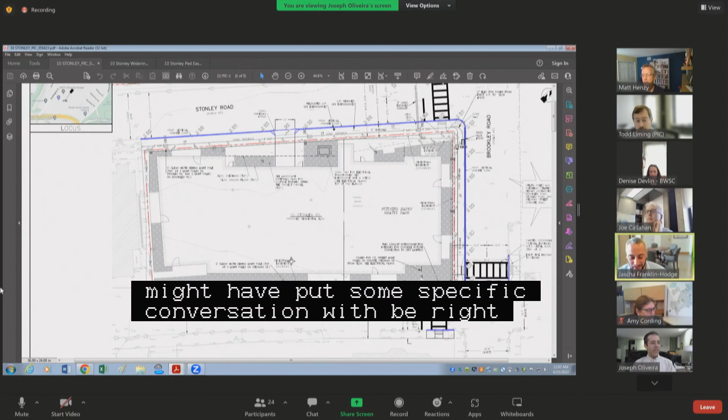Oh okay, I'm sorry. So this is the specific repairs plan, and it includes new sidewalks and new curbs along Stonley Road and Brookley Road, which are public. It also includes new sidewalk and curb line along Stedman Street, which is private. It also includes new handicap ramps, crosswalks, and a triangle which narrows the intersection of Brookley Road and Stonley. It includes some new handicap ramps and a street tree.

Glad to answer any questions. I will just note that the previous discussion related to the installation of speed humps along Brookley Road and in this general vicinity likely belonged in this hearing item. So just to confirm, is it correct that the proponents will work with the active transportation team to identify the appropriate locations for the installation of speed humps in this area as part of the project?

That's right. We'll reach out to William Moose and coordinate the location and size. I'll stick you guys in an email with the appropriate BTD folks right now to get you started on coordination. Great, thank you, Amy. Thank you, Amy.

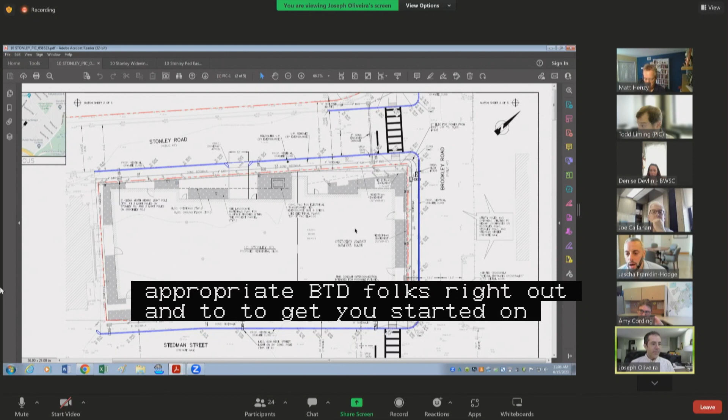One minor item, I believe the triangle, if I'm oriented correctly, is being added at the edge of the MBTA bus facility, or at that abutting property. Has there been any discussion with the MBTA about expectations for winter maintenance, shoveling, clearing of that pedestrian ramp? Are they aware of the change that's happening outside their facility?

Yeah, I'll take that. The normal distribution to public agencies and utilities included the MBTA. I did not get any replies back, and have documented a few attempts at outreach. So I'd like to continue, even just on an operational basis, to make some more solid contact with somebody in charge of the bus yard to go over those operational issues.

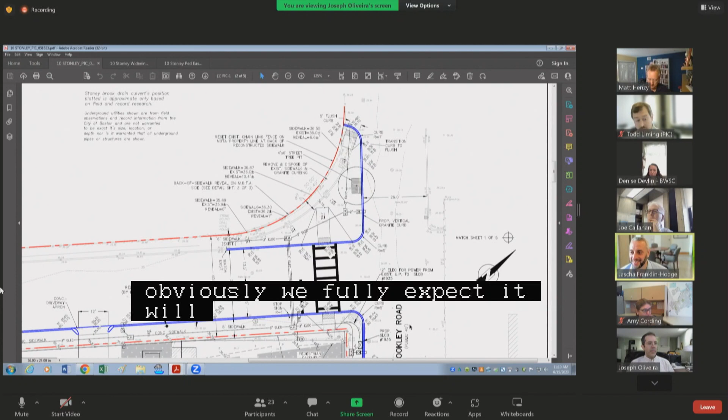Absolutely, so we can stipulate to that in the hearing resolution, but that's certainly what we intend to do. Excellent, well we'd be happy to help facilitate that, and obviously we fully expect the MBTA will fulfill their legal maintenance obligations on this space, but we also just want to make sure they know it's changing, in case it has any operational implications for them. Understood.

Any other comments or questions from the commission? PIC staff or members of the public? No, I'll just ask that we settle on the location of these speed humps before submitting Mylars, and have those Mylars reflect the speed hump locations. And the PIC order will also include speed humps in the description of improvements. Understood.

All right, hearing no other comments or questions, do we hear a motion to approve public hearing number 11? I'll make a motion to approve a petition by Stonley Brookley LLC for the making of specific repairs in Stonley Road, Brookley Road, and Stedman Street, as read into the record by the chair, contingent upon final speed hump locations as proposed by BTD. Second. All in favor? Aye. Aye. Aye. Any opposed or abstain?

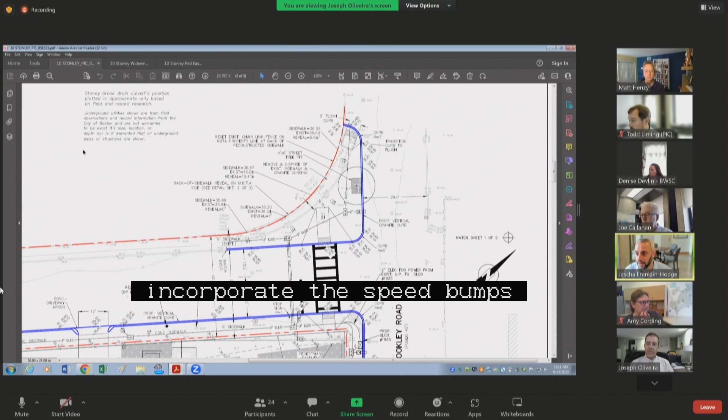So moved. Thank you very much, and thank you also for the willingness to incorporate the speed humps into this, in addition to this changing nature of this street into a residential area. There's also a daycare and a circus school on Brookley Road, and I'm sure that the folks who use those facilities will appreciate having a calmer street. So appreciate you incorporating that into this. Thank you very much. Absolutely. Thank you. Thank you.

All right, on to public hearing number 12, on a petition by Roxbury Tenants of Harvard Association for the making of specific repairs within the following public ways in Roxbury, consisting of curb and sidewalk reconstruction with structural soil, as well as new and relocated specialty pavement, street trees, planters, landscaping, bike racks, and driveway curb cuts. Huntington Avenue at address number 775, generally between St. Albans Road and Fenwood Road. St. Albans Road, generally between Huntington Avenue and Mission Park Drive. New business on 5/25 is shown on a set of plans entitled City of Boston Public Works Department Engineering Division Specific Repairs Plan, 775 Huntington Avenue, St. Albans Road, Public Way, Mission Hill, 4 sheets dated June 2023.

Would the proponents please introduce themselves, their affiliations, give us a brief reintroduction to the project, and any changes since your new business hearing.

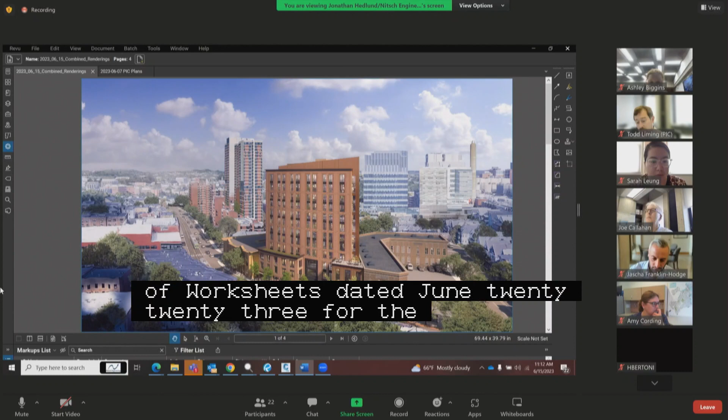Sorry, I just had to figure out how to get off mute. So Peter Munkenbeck is my name, and thank you, Mr. Chairman and Commissioners.

This project, as you can see from the picture, is over 100 units of housing, 75% of which will be affordable. It is proposed by the entity Roxbury Tenants of Harvard, which is also responsible for the buildings you saw in that last plan off to the left. They own about 1,000 units in this neighborhood, and this will bring the number to over 1,100. You're seeing now 3 different renditions of the property, as well as different perspectives on it from Huntington Avenue.

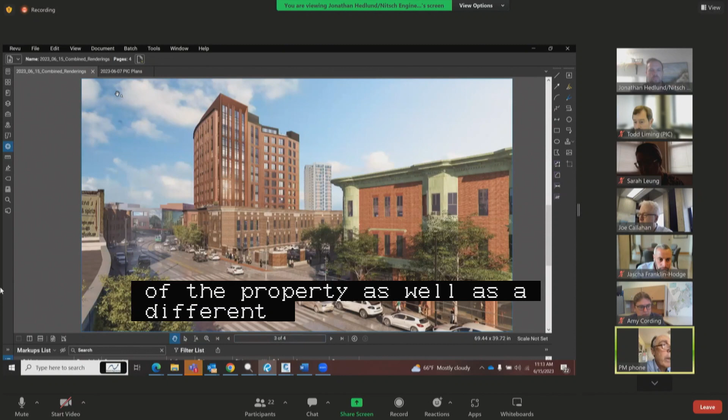It's located between the old Farragut School, now the Kennedy Allied Health School, on the right, and on the left a 3-story historic apartment house, also owned by the Roxbury Tenants of Harvard. All of the abutters behind it and around it, except for the school, are on Roxbury Tenants of Harvard property.

This proposal has gone through many iterations before landing on this one. This is the one we understand accommodates all of the concerns and comments from the different agencies invited to comment on specific improvements. And it does explicitly agree to address one of the challenges posed in the review.

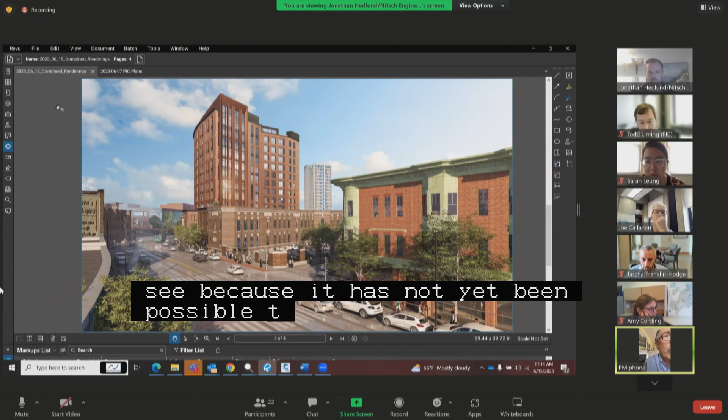Which is the Blue Bikes challenge, to be resolved in a separate and subsequent action before the PIC, because it has not yet been possible to identify a location that meets the expectations of all the commenting parties with regard to Blue Bikes. But the rest of the proposal, I think, is intact, and Jonathan will walk through the 2 perspectives, or the 2 plans, one being the one right out in front of the apartment house.

Jonathan? Yes, so I'm Jonathan Hedlund with Nitsch Engineering. First, I'll start with Huntington Ave. We originally had new business on May 25th.

So this project follows the complete streets guidelines. We have a 6-foot pedestrian zone, a 3.5-foot pervious paver zone, 2 new street trees, maintaining 2 existing street trees, and we're also installing bike racks. From the last meeting, we had conversations with BWSC, and they had us remove one of those street trees because of conflicts with the existing combined sewer in the area. We are maintaining the curb alignment with the new granite curb. Any questions?

Commissioners, questions? Well, I just wanted to say thank you to the team for meeting with us and making that change. No problem. Moving on to the driveway reconstruction.

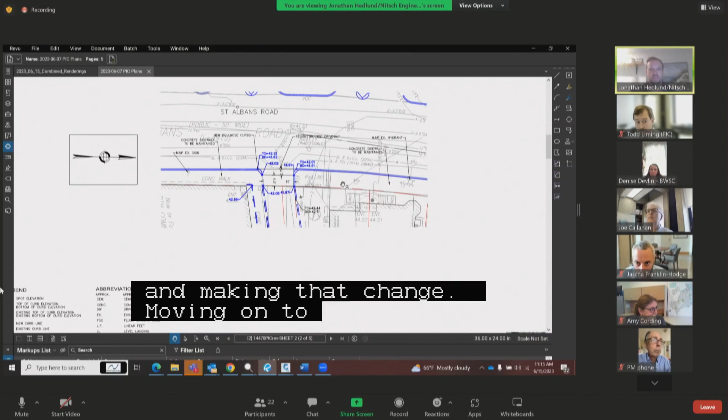There's an existing driveway that we're reconstructing with new bullnose curbs. We are maintaining a 5-foot pedestrian access and maintaining the curb alignment. Any questions?

Are there any other additional elements you're showing, or is this the conclusion of the specific repairs presentation? That is the conclusion. All right, commissioners, anything else?

PIC staff, members of the public? Peter, you may have mentioned this, if you did I apologize, but can you just clarify that the project will potentially return to PIC in the future once the Blue Bike Station location has been established, if you need curb work or anything like that? Correct. If we find a Blue Bikes location that is consistent with the existing streetscape and does not require any alterations, we will not be back. But if we do encounter the need to change anything within the jurisdiction of the commission, we'll be back.

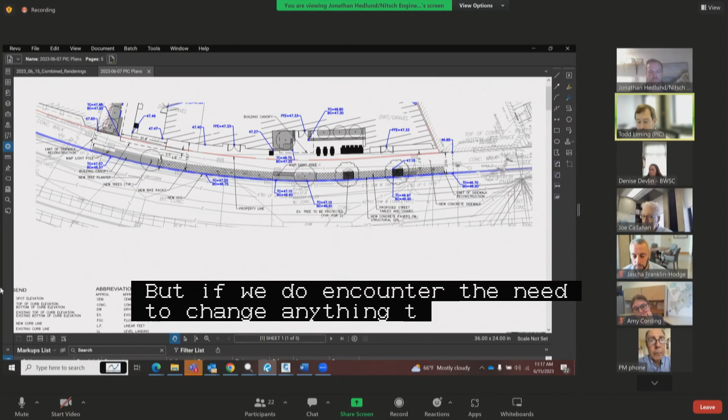Perfect. Thank you. I would just get rid of the note that says proposed street tables and chairs. Duly noted, that will be updated with Mylars. Yeah, that's a leftover. We did get rid of them based on earlier comments. They're not there, it's just the note.

All right, hearing no other questions or comments, do I hear a motion to approve public hearing number 12? I'll make a motion to approve a petition by Roxbury Tenants of Harvard Association, Inc. for the making of specific repairs in Huntington Avenue and St. Albans Road as read into record by the chair. Second. All in favor? Aye. Aye. Any opposed or abstained?

So moved. On to public hearing number 13, on a petition by Roxbury Tenants of Harvard Association, Inc. for the installation of a canopy over a portion of the sidewalk within Huntington Avenue Public Way, Roxbury, located on its northerly side at address number 775, generally east of St.

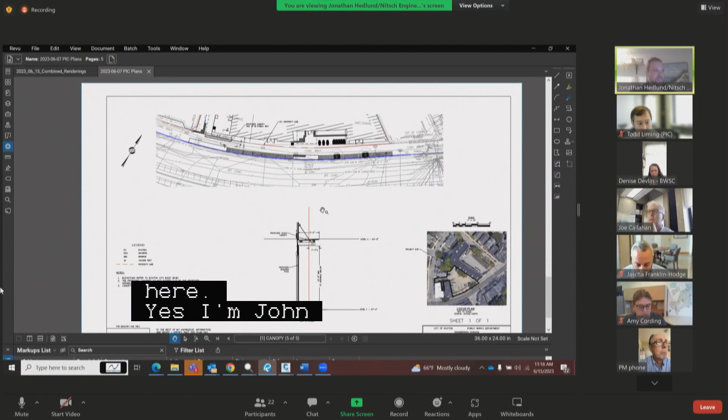The proponent reintroduces the matter: Jonathan Hedlund with Nitsch Engineering, on behalf of the petitioner, proposing a 1.6 foot projection into the public right of way, well above the 10-foot minimum requirement from sidewalk clearance. It will be internally drained and heat traced.

The chair asks if commissioners, PIC staff, or members of the public have any questions. All set on this one.

A motion is made to approve public hearing number 13, a petition by Roxbury Tenants of Harvard Association, Inc. for the installation of a canopy on Huntington Ave as read into record by the chair. It is seconded, all in favor, none opposed or abstained. So moved.

Public hearing number 14: a petition by One Post Office Square LLC for the acceptance of a pedestrian easement adjacent to Pearl Street, Public Way, Boston proper, located on its northeasterly side at One Post Office Square, southeast of Milk Street. New business from 525, as shown on a plan entitled City of Boston Public Works Department Engineering Division Easement Plan, Pearl Street, downtown, one sheet dated June 5th, 2023.

The proponents introduce themselves: Nate Cheal, civil engineer with Tetra Tech, along with John Wild on behalf of One Post Office Square ownership, and Courtney Sudak, also with Tetra Tech.

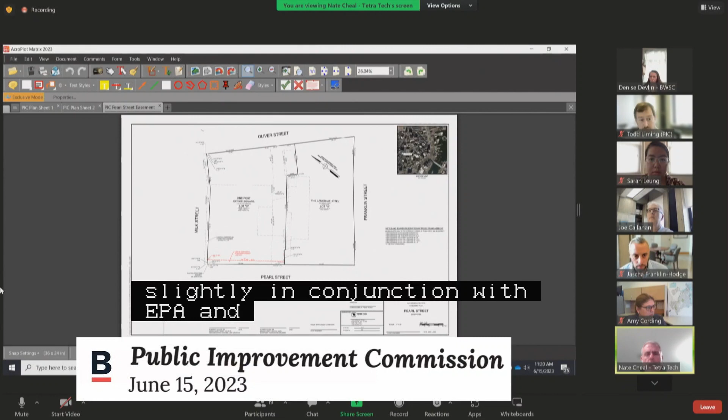Nate shares his screen to present a variable width surface pedestrian easement along Pearl Street. Since the new business hearing, the easement has been adjusted slightly in conjunction with BPDA and Sarah Leung with the Disabilities Commission. The easement is needed because existing street furniture does not provide a clear pedestrian path within the public way. The variable width easement is approximately 9 feet along the Milk Street end, coming down to about 7 feet on the southeast side.

Nate shares a specific repair plan to further illustrate why the easement is necessary, showing existing street furniture that will remain, which leaves no clear path through the public way. An 8-foot minimum path is proposed coming back across the front of the property, allowing for a clear 8-foot path of standard concrete for pedestrians to use.

Nate offers to answer any questions on the easement. The chair asks commissioners, PIC staff, and members of the public for questions. All set.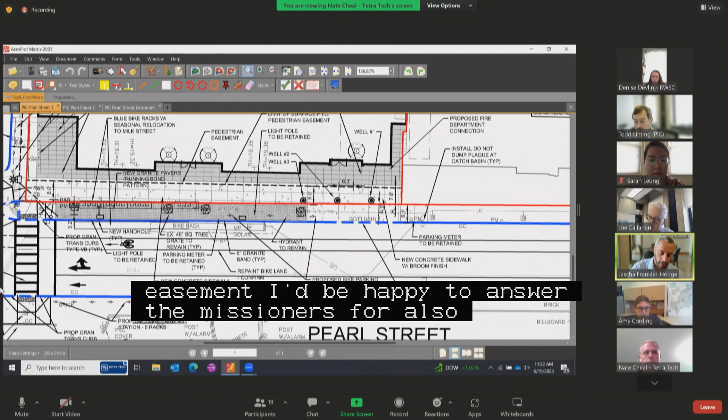A motion is made to approve public hearing number 14, a petition by One Post Office Square LLC for the acceptance of a pedestrian easement adjacent to Pearl Street as read into record by the chair. Seconded, all in favor, none opposed or abstained.

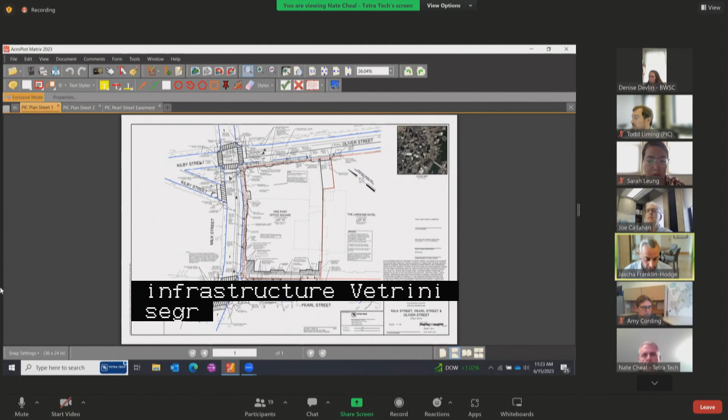So moved. Public hearing number 15: a petition by One Post Office Square LLC for the making of specific repairs within public ways in Boston proper, consisting of curb realignment, roadway and sidewalk reconstruction, new and relocated pedestrian ramps, specialty pavement, street lighting infrastructure, street trees, irrigation infrastructure, bike racks, and driveway curb cuts, on Pearl Street, Oliver Street, and Milk Street. New business from 525 as shown on a set of plans entitled City of Boston Public Works Department Engineering Division Specific Repair Plan, Milk Street, Pearl Street, and Oliver Street public ways, 2 sheets dated June 5th, 2023.

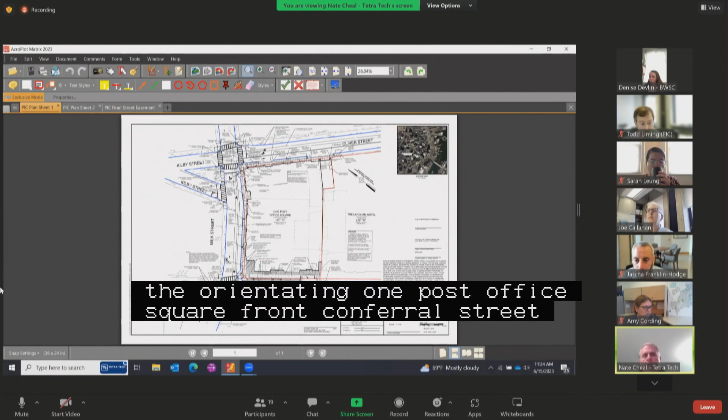The proponents reintroduce themselves: Nate Cheal with Tetra Tech, civil engineer for the project, along with Don Wild representing One Post Office Square ownership, and Courtney Sudak, also from Tetra Tech. Nate orients everyone: One Post Office Square fronts on Pearl Street, with the front door located there, and also has frontage on Milk and Oliver Street. He begins with specific repairs proposed for Pearl Street.

Currently, Pearl Street is all granite pavers. The proposal is to remove the granite pavers and provide a standard concrete path that fits within the easement. Since the new business hearing, there has been a meeting with BPDA and a furnishing zone paver strip has been incorporated, which is essentially not passable by pedestrians, hence the 8-foot wide easement behind the furnishing zone.

Along Pearl Street, we're maintaining the existing street lights and existing street trees. We will be replacing the metal handholes associated with the street lighting, and we'll be accommodating a seasonal relocation of blue bikes. During the summer, they're out on the street, but during winter months they can be moved up onto the sidewalk. We're reconstructing the handicap ramp at all sides of the intersection of Milk and Pearl, and on the project side, we will be providing a bump out to accommodate the handicap ramps.

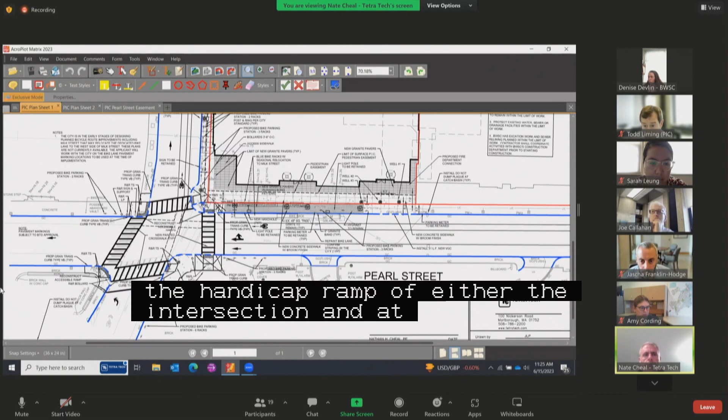Along Milk Street, we'll be replacing the existing sidewalk with standard concrete. Should have mentioned for Pearl Street, all the joints will be saw cut. We are providing, I believe, 3 new street lights along Milk Street, maintaining an existing street light.

At the intersection with Oliver Street, we'll be constructing another bump out on the project side. We'll be reconstructing all the handicap ramps around this intersection and wrapping around onto Oliver Street, again reconstructing the sidewalk with standard concrete and saw cut joints.

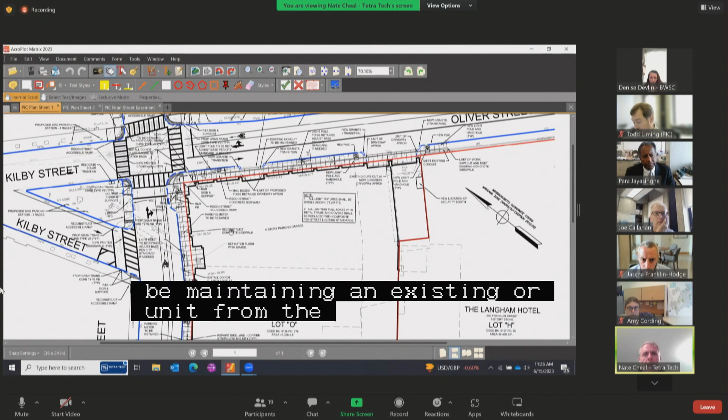Also in this area, there's an island that exists at Milk and Kilby Street. We'll be reconstructing a curb along the project side and providing a new concrete sidewalk with ramps, reconstructing ramps on each end of the island, and also on the corner over here we'll be providing new accessible ramps.

Since new business, we've also had some discussions with Boston Water and Sewer. There's a number of catch basins around the project that don't have gutter mouths, and a lot of them are falling near these new ramps that we're proposing. So as we complete the ramp design, we will be meeting in the field with Boston Water and Sewer to determine which catch basins are feasible to get a new gutter mouth in on, and then we'll resubmit a site plan to Boston Water and Sewer for their approval. We've also been asked to provide the don't dump plaques at these various catch basins, which we'll do as well.

I think that wraps up my planned presentation for the specific repairs, and happy to answer any questions that the commission may have.

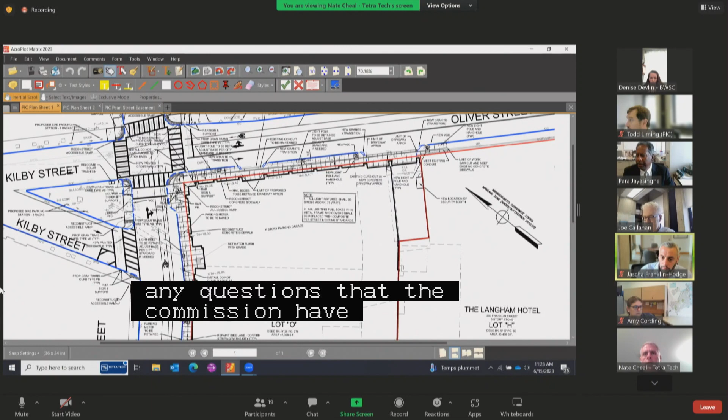Nate, sorry, I forgot to mention this at the new business hearing. The little island that is there between the two Kilbys, triangular island - are you happy with the way it looks in comparison to your amazing project? I've lost track of it. I think it may need attention. Are you happy with the way it looks? I think it'll look much nicer once we get a sidewalk in there, but at this point we're not aware of what the plans are for this.

Yeah, the triangle - I feel like we are running out of people, everyone seems to be chopping up the area, and that triangle has seen better days. If you can give some thought to it. I'm not asking for it, but I have a feeling you will have an amazing sidewalk treatment on your side of the project, but that leftover triangle - I hope you know what I mean by the triangle, it's between the two Kilbys. It's an awkward location. Agreed. And give some thought. Okay, thank you.

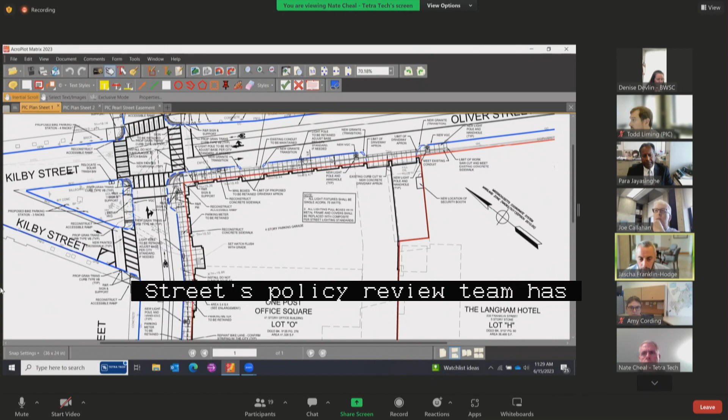Can I confirm - I know that the streets policy and planning team, the active transportation team, has been working on a bike lane project that incorporates Milk Street. Has this design been coordinated with them in that planning effort? Yes, we've worked quite diligently with William Moot on all the elements of these ramps and what's happening with the bike lane. Actually, at this point, William has asked that we not stripe, that we restripe Milk Street as it exists today, just because they're not 100% with their design, and they've let us know that, but we have worked extensively with William and Sarah as well in arriving at this design.

Excellent, well I appreciate that coordination. I would just ask that it continues even after you're through the PIC, just to make sure that things are sequenced and striped appropriately depending upon the relative progress of that project and your work. Yes, we will do that.

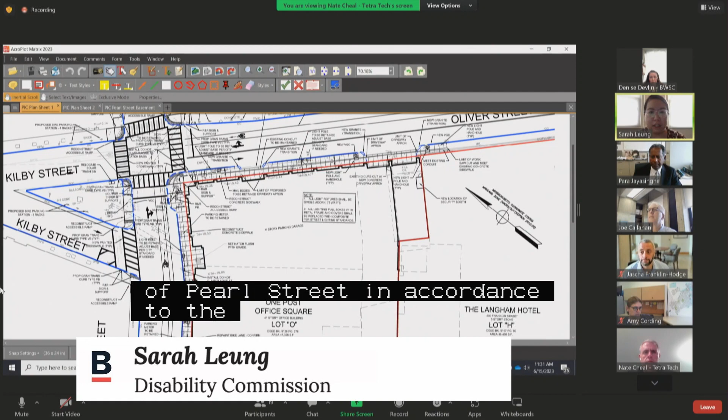Thank you. I think on that note, we just want to recognize the team in working with myself as well as William Moose and the BPDA on this design for this intersection as well as the intersection on Pearl Street, in accordance to the layout of the ramps and the materiality as well as the pedestrian easement, and thank the team for incorporating our feedback. Thank you.

Commissioners, any other comments, questions? PIC staff, members of the public? No, I think we're all set on this.

Do I hear a motion to approve public hearing number 15? I'll make a motion to approve a petition by One Post Office Square LLC for the making of specific repairs within Pearl Street, Milk Street, Oliver Street, and Kilby Street as read into the record by the chair. Second. All in favor? Aye. Any opposed or abstained? So moved. Thank you very much. Appreciate it.

That concludes the public hearing section of our agenda, and on to our new business. We have three items all from the same petitioner, and we will start with new business number 1, Beacon Street, Boston proper, city shadow rental on a petition by Cambridge Network Solutions Incorporated. Would the petitioners please introduce themselves, their affiliations, and what you are proposing to do with the shadow conduit?

Can you see me? Can you see my screen? We cannot see your screen, but we can see you. You can't see the screen. Okay, let's try this.

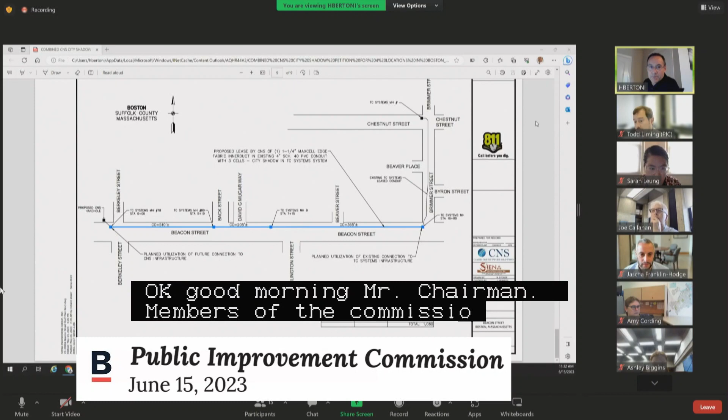Much better. Good morning, Mr. Chairman, members of the commission. My name is Herb Bertoni from Cambridge Network Solutions. I am petitioning to lease city shadow conduit at these three locations within the city.

We'll hit new business number 1, first of all, on Beacon Street. It is 1,080 feet from an existing TCS manhole to another TCS manhole along Beacon Street. So we are looking to tie in from Berkeley at Beacon to Beacon at Brimmer in the existing cable TV system. So that's where we're looking to lease.

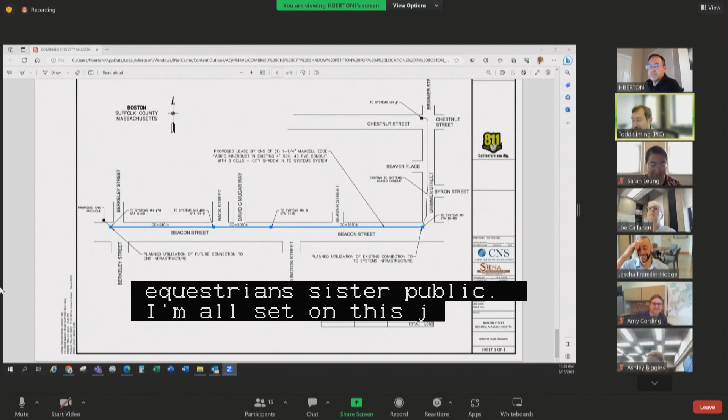Commissioners, any questions? PIC staff, members of the public? Nope, all set on this. Just obviously super excited to have anybody renting City Shadow, let alone multiple sections. Indeed, to echo that, every time we're not cutting and trenching in our streets is a great thing. So we're very appreciative of the work to plan this out in the way that you've done it.

So hearing no other comments, will you be ready for your public hearing in two weeks on June 29th? Yes, we will. All right, well, we will see you then.

On to new business 2, Huntington Avenue, Louis Prang Street, Roxbury City Shadow Rental on a petition by Cambridge Network Solutions Incorporated. Could the presenters please reintroduce themselves and give us an overview of this action?

Mr. Chairman, members of the commission, Herb Bertoni from Cambridge Network Solutions. We are looking to lease, let's see, this is number 2, approximately 1,680 feet of conduit. Let me get to that one. Show you. So there's two pieces here.

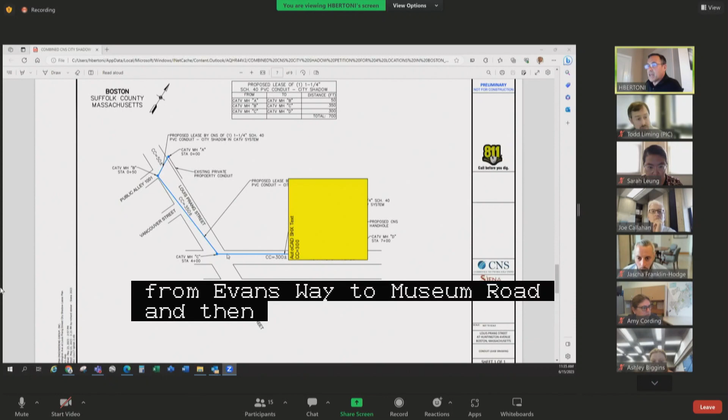So it's 1,680 feet total along Huntington Ave from Evans Way to Museum Road, and then coming back from Museum Road in the cable TV system going up Louis Prang, existing private handhole. So I have it broken down into, it's new business two, but one's in the cable TV system and one's in the Verizon Business System from here to here. So we're going to place a couple of handholes here to tie the systems together. And once we get it approved through the city, we can move forward and place cable.

All right, commissioners, questions, comments? All right, PIC staff? No, we'll just have you combine these plans into one single plan set for the public hearing, Herb. Will do. All right, well, we'll see you in two weeks for this one as well.

And last but not least, new business number 3, East Street, South Boston, City Shadow Rental on a petition by Cambridge Network Solutions Incorporated. Would the presenter please reintroduce himself and affiliations and let us know what you're looking to do here.

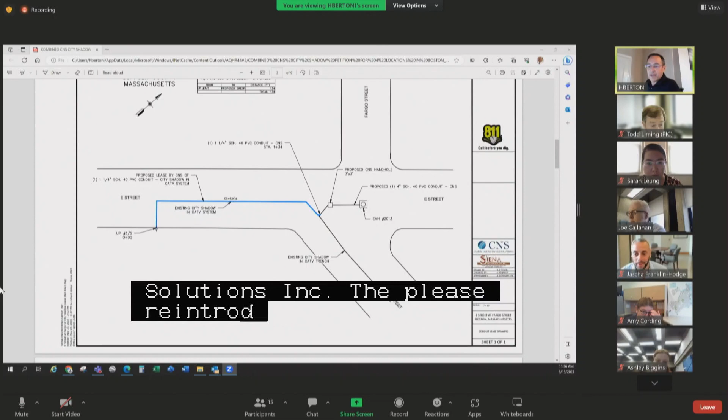Again, good morning, Mr. Chairman and members of the commission. Herb Bertoni from Cambridge Network Solutions. We are looking to lease 134 feet of city shadow conduit from pole number 5 on E Street to a proposed new CNS handhole on Fargo at E Street in the existing cable TV system, as shown on this screen.

Any questions? PIC staff? All set. All right, well, we'll see you in two weeks on this as well. Thank you very much. Okay, great. Thank you very much. Take care.